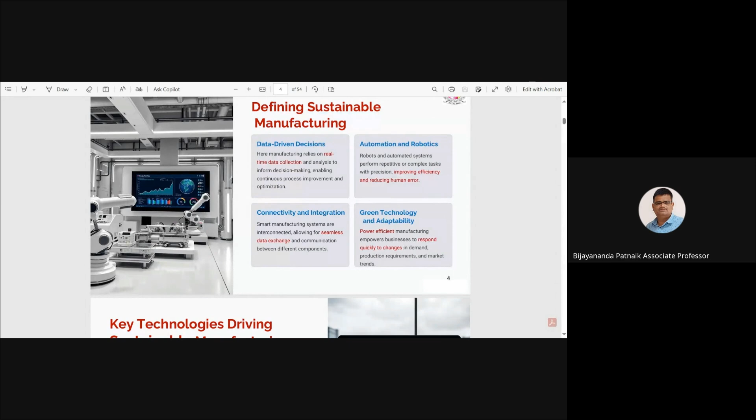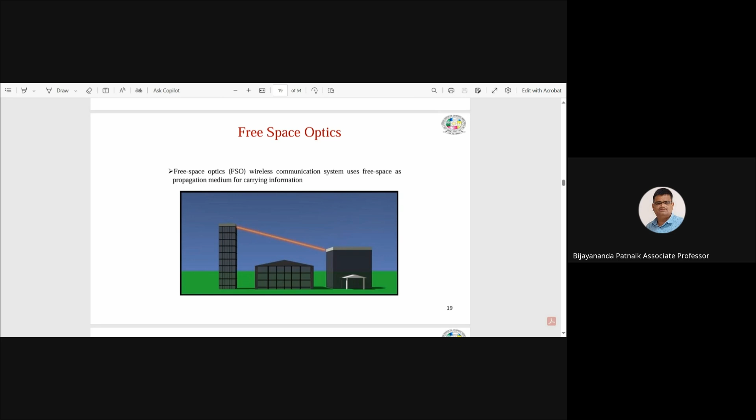So that is why free space optics means, in simple terms, from one building to another building the communication is established without using the fiber, but with the help of a laser beam. And we are using laser basically because of its advantages like low power consumption and very high bandwidth. Okay, I think this is clear.

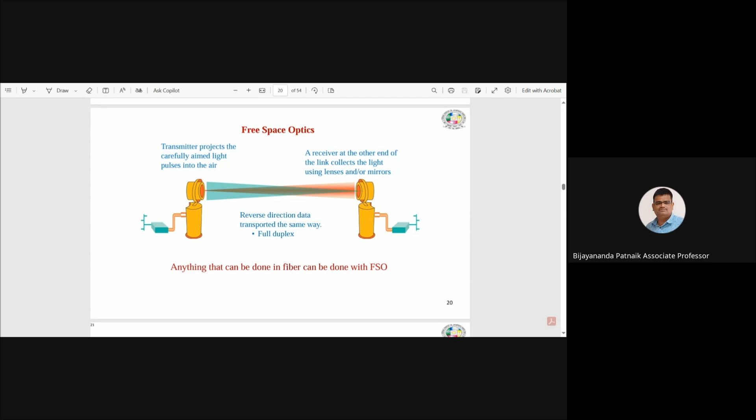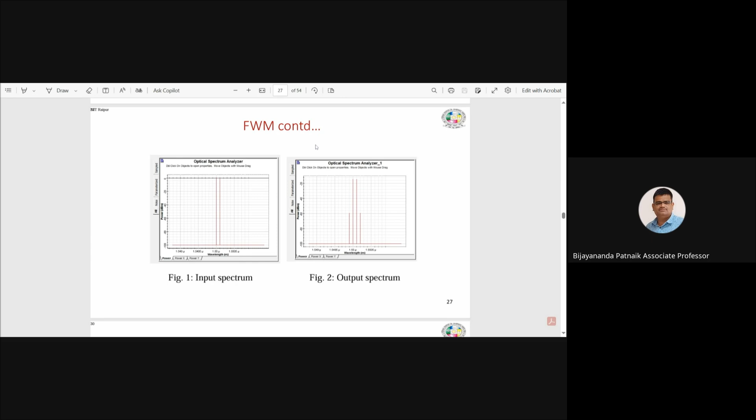This is what is called the FWM effect. Because at the transmitter I am transmitting 2 signals, but at the receiver I am getting 4 signals. So that is why this is called the four-wave mixing effect. And that four-wave mixing effect should be minimized. Then only the communication system will be efficient.

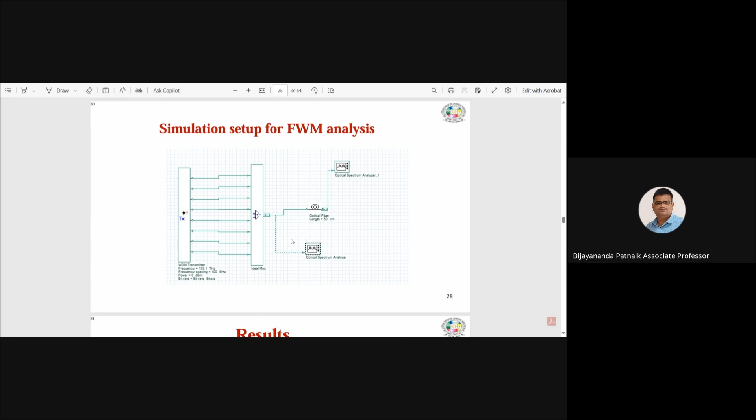Here I have taken the distance as 50 kilometers, but you can also take 100 kilometers or thousands of kilometers. But if it is thousands of kilometers, definitely the signal will be completely distorted. That is why in fiber optics communication we have multiple repeaters at different places. At a maximum distance of 100 kilometers we keep a repeater, freshly generating zeros and ones to reproduce the signal. So this is a simple setup which is useful for our FWM effect analysis.

So what I mean to say is, this kind of nonlinear effect is reducing our SNR as well as increasing the bit error rate, which should be taken care of. So in simple terms, in a fiber optic communication system, if spurious or undesired signals are overlapped with the original signal, how to mitigate it? That is the major challenge.

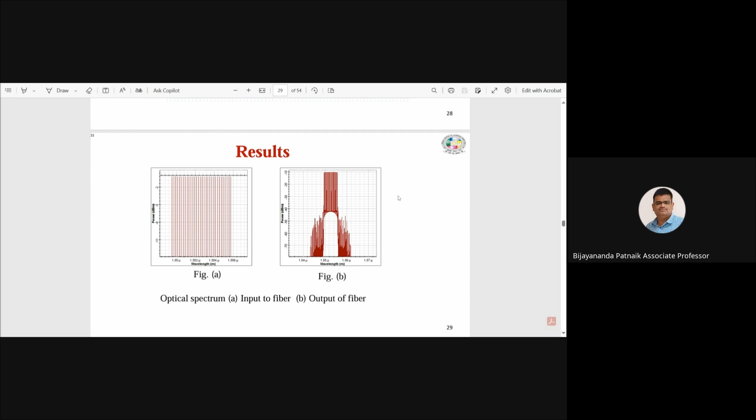And you can see here, whatever spectrum signals are available at the right hand side and left hand side, we can easily eliminate by using a filter. But what is overlapped with the original signal is very difficult to remove using the filter, which will drastically reduce the SNR. So it has to be taken care of so that proper, good communication can be established. Similarly, another diagram has been shown here.

So is it audible? I think somebody has written mic is off. My mic is not off. So is it audible what I am telling? Somebody has told that mic is off, not audible. I think it is not the thing. Audible, right? Yes, sir, it's audible, sir. Okay. Thank you.

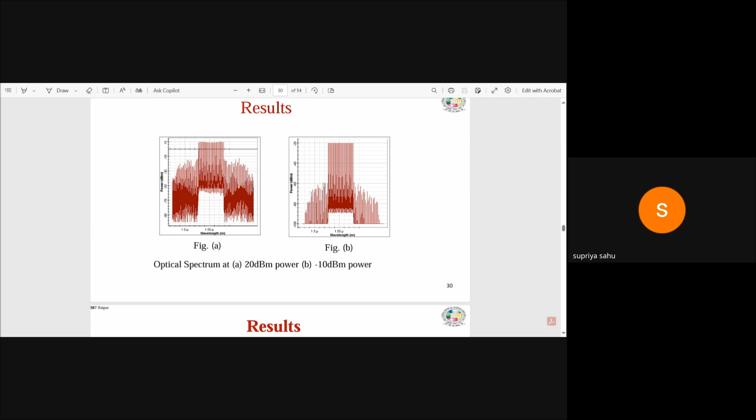So you can see from these two spectra, figure A and figure B, which is better. In figure A, the undesired signal power is around minus 10 dBm, but in figure B, the undesired signal is around minus 40, below, around minus 50 dBm. So minus 50 noise is very good compared to minus 10. So figure B is better compared to figure A. But how to get figure B? In figure B we have used an input power of minus 10 dBm, very low power compared to this input, which is 20 dBm.

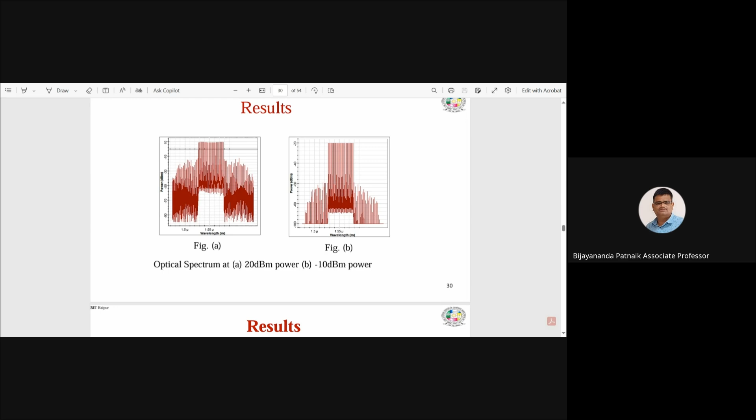So in a fiber optic system, a low input power like minus 10 dBm, compared to a high input power of 20 dBm, provides a better result. But you also know that if the input power is too low, then we need multiple repeaters, and the SNR will be poor and the error will be increased. So we have to find an optimization technique where the input power is neither too low nor too high, so that we can reduce the FWM effect as well as get high SNR and low BER value.

Figure B has been achieved by using MDRZ. These are all coding techniques, and MDRZ provides a better result compared to CSRZ. So that is what I have shown you as mitigation techniques. If you use two different types of coding and compare the OSNR, and the OSNR is better for a particular coding than the other one, then definitely it provides a better result. So in an optical communication system, for achieving ultra high speed communication, the coding techniques should be efficient enough so that we can get a very high SNR value.

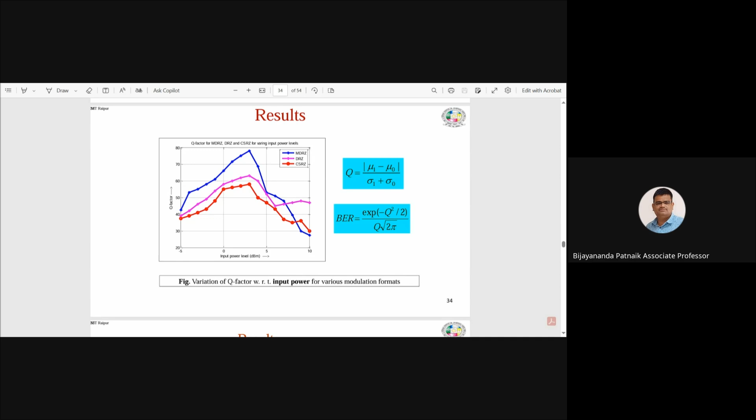Similarly, for the communication system, FWM - the four-wave mixing effect - is a function of input power, channel spacing, and fiber optics. We are transmitting millions, billions of telephone calls, so it is a function of channel spacing. It is also affected by various modulation formats and coding techniques, and the effective cross-sectional area of the fiber also plays a major role. So we have to check each and every parameter and use optimization techniques to get good results.

From these results, it is clear that FWM effect can be minimized using various techniques, such as input power should be as low as possible. If input power is very low, this undesired or spurious FWM effect will be less. Channel spacing should be as high as possible. Similarly, fiber cross-sectional area should also be as high as possible, and preferably MDRZ should be used compared to CSRZ technique. But each technique has its own limit.

If input power is too low, we need multiple repeaters to amplify the signal multiple times, and the SNR will be less. So input power should not be too low as well as too high. Similarly, channel spacing should not be too low or too high, and cross-sectional area should not be too high or too low. If it is too high, single mode will change to multi-mode, where we cannot go for long distance communication. But if it is too low, it again provides undesired or spurious signal.